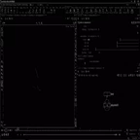So let's build that by dropping down a font here, diving in there, and let's just use a simple N for now, and set the font to maybe Chivo Black Regular. Let's extrude this using a poly extrude, and maybe let's extrude this 0.15 units. Let's leave the output back unchecked so we have an open geometry here, and then drop down a transform. And I want to rotate this minus 90 degrees so it sits flat on this plane here, like so.

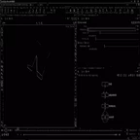Next, let's remesh this to generate our simulation mesh using the remesh SOP. And I want to use all input edges as hard edges so they don't get mushed around. And let's use a target edge length of 0.03 with, let's say, a high iteration count, 32. So we get a very uniform mesh like this.

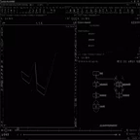Also, I want to copy these two nodes here and paste them over here. And in this one, the poly extrude, check the output back. So when I highlight the transform here, we now have an enclosed geometry. And I want to feed that into a VDB from polygons, because what I'll do here is I will build a collision geometry that's shrunk a bit, so it doesn't collide initially. I'm going to use the VDB from polygons here.

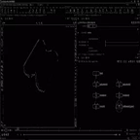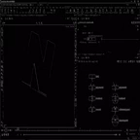Let's just dial back the voxel size to something really small, say 0.0025. And also I want to increase the exterior and interior band voxels to say 8. Next I'm going to use a VDB reshape SDF, which I'll set to erode this letter N. And let's just ghost our initial letter here and see how the erosion offset manipulates our geometry. Let's set this to something rather big, say 8.

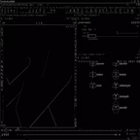So now I see I don't have any parts of my original geometry intersecting with the VDB that I just built. Let's convert this back to a polymesh using the convert VDB, set to polygons, and in here this is a bit dense for my taste, so I'll crank up the adaptivity to say 0.1, and that seems good.

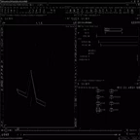Alright, let's just save this, and let's set up our Vellum constraints by highlighting this remesh node here and dropping down a Vellum cloth constraint, and also a Vellum solver. Let's highlight the Vellum solver and increase the substeps while decreasing the constraint iterations to say something like 10. And also in the forces tab I want to disable the gravity and instead have a bit of wind blowing along the z direction, so maybe 3 units in the z direction and 4 in the y direction. So we're blowing this cloth here diagonally upwards.

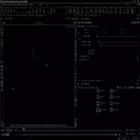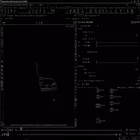Let's just simulate this. Well, not much to see here. This cloth just lifts up without even intersecting with our underlying geometry. So let's take care of that by just directly feeding this collision geometry into our Vellum solver. So that's my collision geometry here. And again, let's resimulate this. And now we have some slight collision happening here, where this mesh touches the end.

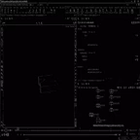Now what I want to do is control this peel-off effect. And for that I need constraints. Constraints that pin my simulation mesh to our original geo. For that I'll use a Vellum attach to geometry node, which I'll wire in between the cloth and the Vellum solver. And instead of this collision VDB here, I will feed in my original remeshed mesh in here.

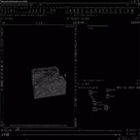So what that will yield if we drop down a null object and attach this to our constraints here is you can see those spheres here, and those are constraints which pin our cloth to this original geometry here, the very same geometry that we're then using for simulation. Now that I created those pin constraints, I want to have them in a separate group. So down here I'll check output group, call this group maybe attach because they attach this to the original geo, and it's set to be really stiff currently.

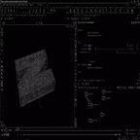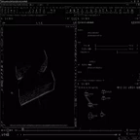So let's just see how that looks and highlight the Vellum solver and simulate this. And you can see nothing is moving here because these constraints are really stiff. However, if we lower the stiffness here to say a value of 10 and resimulate this, we can see those constraints have a bit of give, but still keep this cloth to the original geometry. Let's reset this value here.

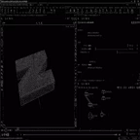So to control this peel-off effect, I will use some geometry, which I will animate through this mesh here. And as soon as my animated geometry comes close to any of those points, any of those constraints holding the mesh onto the original geometry, I will release those constraints. I basically will delete them.

So let's do that by creating a grid, which is gonna be my geometry, which I'll animate, set the grid size to be 1 by 1, have it along the XY plane, maybe highlight it, so that's my grid here, and increase the rows and columns count to say 100 by 100, like this.

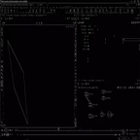Next I'll just animate this, so the first frame I'll set it to say minus 0.6, set a keyframe by alt-clicking in there, and then maybe going to frame 96, I'll move it to plus 0.6, set a keyframe again, alt-click in here, and by shift-clicking I will open up my F-curve, my animation curve editor. Just highlight this animation curve here and make it linear. So now I have just a linear motion of this grid wiping through my geometry.

So to release those constraints that are in the attach group here, I will dive into my Vellum solver, and in here I'll drop down a GeoWrangle and set this up to work on the constraints, which is done under the Data Bindings tab. And in here, instead of binding the geometry, I will bind the constraint geometry. And as for the inputs, input 1 should be just myself, no reads of outputs. And for input 2, I want to input this grid that I just animated. So I'll set this to a SOP, and then in a SOP path, I will navigate to my grid that I animated here and select that.

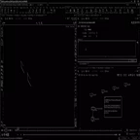All right, I want to have this only run over the attach primitives, so the attach constraints, which I put in the attach group. For each of those primitives, and let's set this to primitives, I want to check if we have points nearby from that grid. So I want to find near points, so NPT is just the integer variable in which I'll store the point number of the closest point that I'll find. And I'm going to use the near point function on the geometry coming in through our second data binding. Again, the second input here, that's this one, the grid, has the ID 1. And I want to look from the current primitive's position.

And then I want to check if we found something. So if near point is returning something that's bigger than -1, because if near point didn't find any points nearby, it will just return -1. So if NPT is bigger than -1, we'll do something. In our case, we will delete our primitive. The primitive, that is the constraint that's attaching this geometry to the original geometry. So remove my primitive on the current geostream with the current prim number. And I want to delete the points of this primitive too.

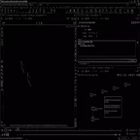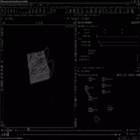However, this will now immediately delete all those primitives because we didn't restrict our near point search to a given distance. So instead, let's set this to a distance of, say, 0.1, like this. Okay, let's go up one level, save this. Fingers crossed, let's highlight our Vellum solver here and maybe pipe in the constraint stream here in the null so we can see what and if something's happening. And also let's ghost the grid. And let's simulate this. So that seemed to have worked. Let's reset this, highlight the Vellum solver, and let's replay this.

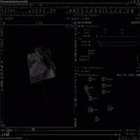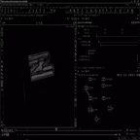So yeah, that's working. Except for one thing, that we now again lost the original collision geometry that we prepared, this thing here. So let's wire that back into the Vellum solver and resimulate. Alright, that too seemed to have worked. So let's reset this. And so what would be nice is kind of this surface lifting a bit or getting released before it completely detaches from the original geometry.

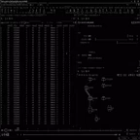Basically, I want to set up a second grid that wipes through this letter before this grid, which releases all the constraints. And what the second grid should do is just decrease the stiffness of those constraints, keeping the cloth onto the original geometry. Basically, what we want to animate is this stiffness value here. And if we go to the geo spreadsheet here with our Vellum attach highlighted and set it to Vellum constraint geometry, go to our primitives here and select everything that is in the attach group here. And we can see we have this very high stiffness value here, which is set to be this value.

So basically what we have to do is set up a second animated grid here. Let's just copy this one, use that. Maybe delay our first grid a bit by shift-clicking in our animation here, and then moving those keyframes out a bit, maybe starting the animation at frame 48. Okay, our second grid, which is the grid that wipes through this letter first, should control the stiffness. So let's dive back into our Vellum solver, and within this same geometry wrangle, let's, under inputs, link up another SOP, our second grid here. Let's just copy this, paste this. Let's rename this to grid 2, like this.

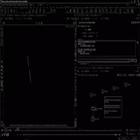And in our code here, let's just copy those 3 lines here, paste them down here. Let's call this one NPT2. And what we want to check here is on the second grid, that's the one coming in through the third input, that's the one with the ID 2. If we find a point close by, then we don't want to remove the primitive, but we want to set a float value called stiffness to something low, maybe 10 in our case. Okay, let's head up one level, save this, and resimulate.

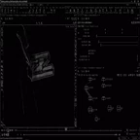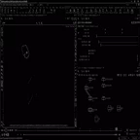Okay, that seemed to have worked, but let's zoom out a bit and replay this animation here. And what we're seeing here is that this cloth is still somehow attached to this geometry. So let's highlight the null to visualize our constraint geometry. And for some reason, we didn't delete all those constraints. So let's just watch this animation closely, what's happening here.

And we can see when the second release happens, the cloth just flips away from the grid without the grid being able to come close enough to release those final few constraints here. So either I could reanimate my grid, make that go a bit faster through my geometry, or I could just in the vellum attach here, enable breaking with my constraints and set this threshold up to a certain value which catches those final few constraints.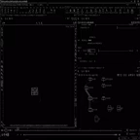And that's a bit of trial and error here in resimulating. And in my case, a value of 0.0025 seemed to give decent results. So again, let's save this and resimulate. So yeah, now those final constraints release too automatically.

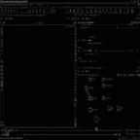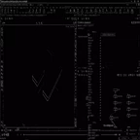So what you typically do now is use this simulation geometry, which is admittedly a bit coarse, to drive a high-res geometry. And we could just fake that by copying these few nodes here over there, maybe just those two, and delete the font here, and check output back again, and then I'll just create a VDB again, which I'll use to create a fake high-res mesh here. Converting this again

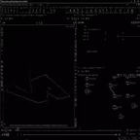to polygons here, and as my original sim geometry is hollow, so hasn't got a back face here, let's just use a clip to get rid of the back face here, and then let's use a point deform to drive my high-res mesh. So high-res mesh goes in the first slot, then the rest mesh, which is just what we feed into our vellum constraints here, and then our deformed mesh, that's the mesh after the simulation. So when I now skip through a simulation, I can see my high-res mesh being deformed here.

And finally, sometimes in a simulation you get errors, especially when you render this with high gloss surfaces. And the reason for that might be normal errors. So what I want to do is, using a point wrangle, I want to blend between the standard normals of this mesh and a blurred out version of those normals, a smoothed normal version of this mesh. And I want to blend depending on how far these mesh points travel away from their original position.

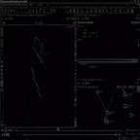So let's do that, dropping down a point wrangle, and I want to compare this against the undeformed mesh position here, and then use another attrib blur version of my deformed mesh. Just quickly highlight this, and in here I will blur the normals of this mesh, maybe for 10 iterations, so they are smoothed out like you can see here.

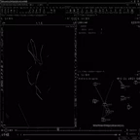Alright, so in my point wrangle, first I'll need to look up my original point position, which when thinking about it, we can do a bit simpler. Just slash this and instead use a rest position SOP here, which will take care of creating our original points position in this attribute called rest here. So we can now wire this attribute blurred version here in the second slot, and then what I can do is compare my current point position against this rest position and measure their distance.

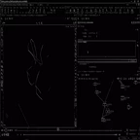So what I want to do is create a float, call it d for distance, and it should be the distance between my current point position and the rest point, the original point position. Next I want to create some sliders to dial in the minimum and maximum distance of our effect to remap it. So let's create a float, call it min, and use a float slider which we'll name min2. Copy this line, paste it here, and do the same thing for a variable which we'll call max. And let's call the float slider max2 and create those two interface elements. Maybe dial in a maximum value of 0.3 for now.

Next, let's remap our distance and call the result of this a bias. And we will fit our distance d between our minimum and maximum float values that we dialed in, resulting in a value of 0 to 1. And finally, create our new normals by blending between our blurred and our non-blurred normals using the lerp function. However, to access our blurred normals, let's just read them using a point function. So a vector, let's call it blurN. And just as we would read in our point position, let's just read in our normal value from our second input slot with the same point number as our currently active point.

Now, finally, we can blend between our current normal and our blurred normal, depending on our remapped distance, which we called bias here. Alright, let's compare this to the original geo, and you can see now, in these areas that had been deformed, my normals are a bit smoother now, without those unsimulated or unmoved areas being affected that much by the blur. So again, that's just a neat hint if you're getting errors in glossy parts of your shading in highly refractive materials or highly reflective materials such as chrome or silver.

And with that, for now I want to bring the Vellum series to an end. It's kind of fitting that we just have a thunderstorm outside, but if you have the feeling that there's something missing here, or something lacking from this series, just let us know, and we might add these parts as an addendum in the future.